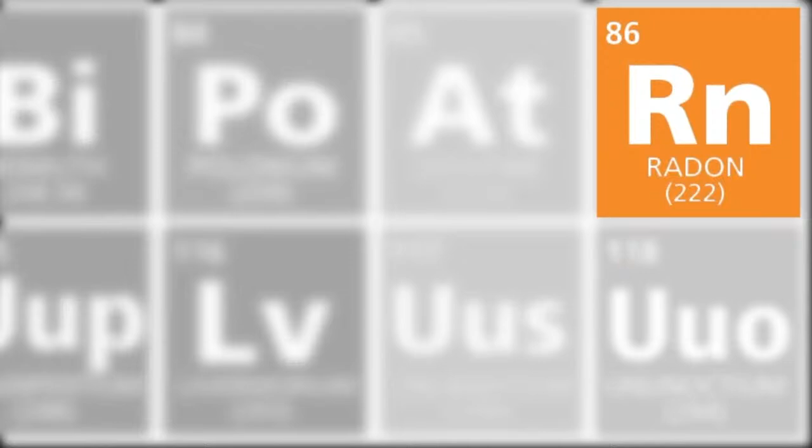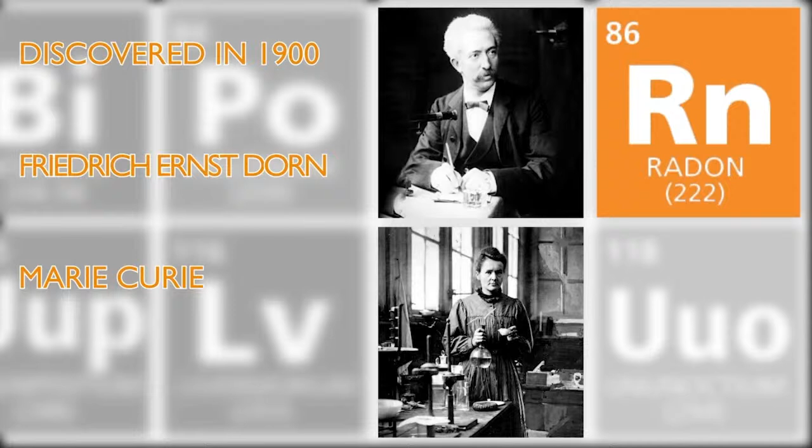Radon is a naturally occurring, colourless and odourless radioactive gas. It was discovered in 1900 by the German physicist Friedrich Ernst Dorn, who was studying the radioactive decay of radium, itself only discovered by Marie Curie 2 years earlier. This work was expanded by the Nobel Prize-winning Scottish chemist Sir William Ramsay, who identified radon as the heaviest gaseous element, 9 times heavier than air.

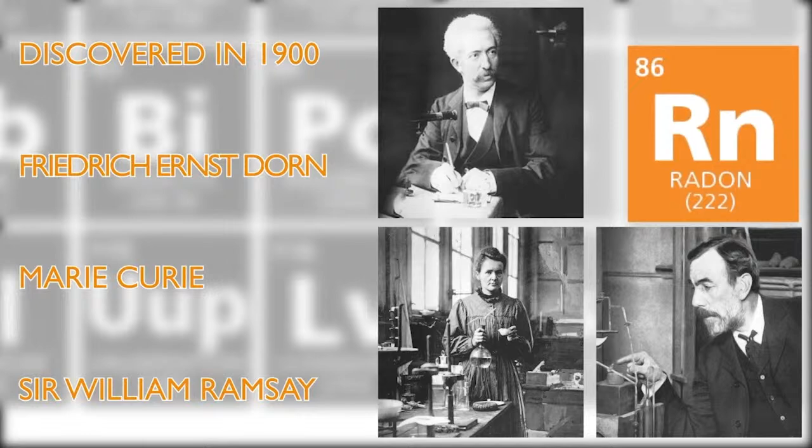In ground gas terms, most radon is produced by the radioactive decay of trace amounts of uranium found in certain types of rock and soil. And as such, the levels of gas present are determined by the underlying geology of the site, as opposed to any historical usage or pollution. This type of geology is most common in areas with granite bedrock, such as southwest England, the Peak District, northeast Scotland and Northamptonshire. Aberdeen in Scotland, being known as the Granite City, has one of the highest background radiation levels in the whole of the UK.

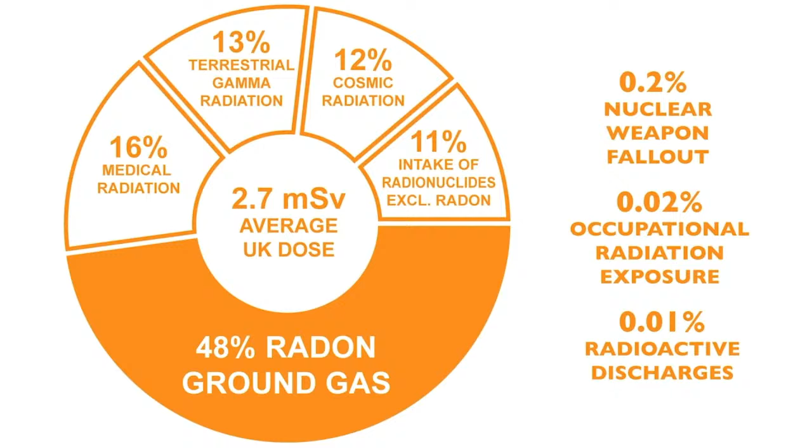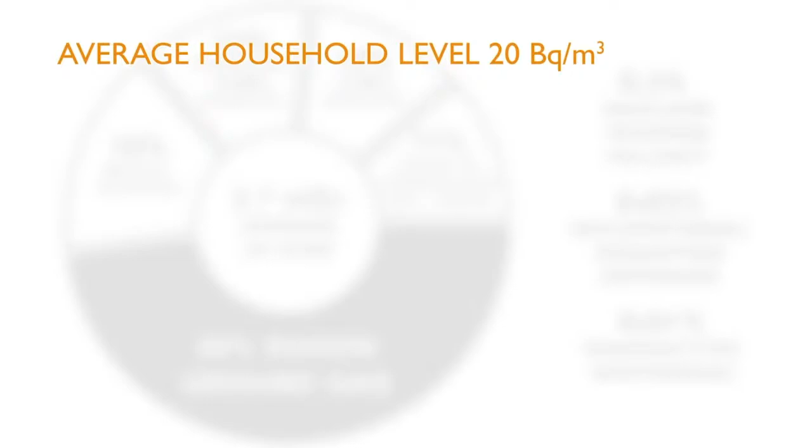Regardless of geology though, we are all exposed to a certain degree of radiation from a wide range of background sources, both natural and man-made. The radon level in an average UK home contributes around half of our typical exposure, and this level is quantified in becquerels per cubic metre. Legislation requiring action against radon in UK buildings has been in place since 1985, initially for workplaces, but has since expanded to include housing. The average household radon level is 20 becquerels per metre cubed, and even at levels up to 100 becquerels per metre cubed, individual risk remains relatively low. However, if the level goes above 200 becquerels per metre cubed, then remedial action is required.

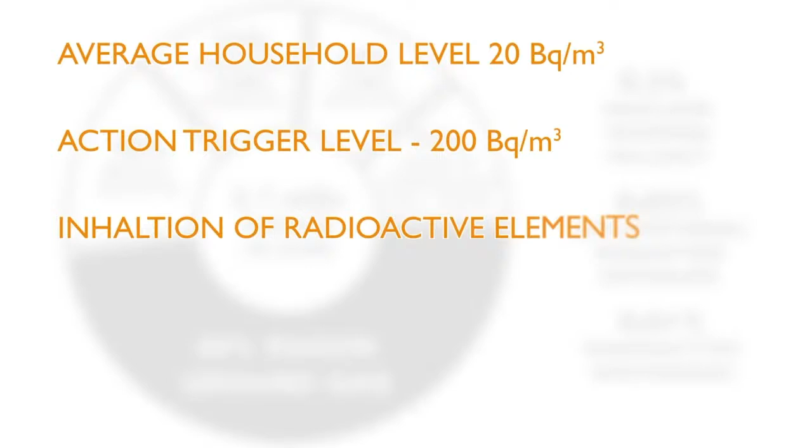Radon is harmful to humans as the radioactive elements formed by its decay can be inhaled into the lungs, where they continue to emit harmful alpha particles. These alpha particles cause localised damage to the lung tissue, leading to the development of lung cancer. The British Medical Journal estimates that around 1,100 deaths per year are directly linked to in-home radon poisoning, making radon the second largest contributor to lung cancer rates behind smoking. Some sources indicate that at least 1,200 new-built homes per year will be above the safe level of radon exposure and should have remedial action taken.

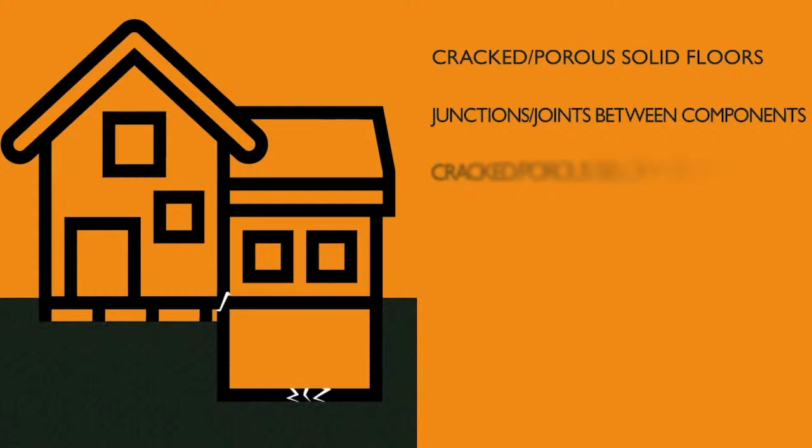This has in turn led to suggestions that building regulations may need to be updated to include more widespread radon protection. The first step to ensuring that an unsafe concentration of radon is not reached is to understand how the gas enters buildings. There are 7 main routes of ingress for radon, or for that matter, any other ground gas. Through cracked or porous solid floors, through junctions and joints between components, through cracked or porous below-ground walls such as in basements, through gaps in suspended floors, through porous walls and foundations, through gaps at surface penetrations and pipes, and through cavity walls.

Because of the geological origins of radon gas, there is generally very little scope to remove or neutralise the source of the gas, so barrier and venting solutions are most commonly employed. Limiting the extent of the ingress paths here can, however, help by reducing the long-term reliance on a barrier and providing additional protection. It's also important from an energy efficiency point of view that airflow through the heated envelope is reduced as far as possible, so minimising the overall porosity of the building fabric should always be a priority.

The principal source of radon guidance in the UK is the BRE document, Radon, Guidance on Protective Measures for New Buildings. This document is referenced in Approved Document C for England and Wales, Section 3 in Scotland, and Technical Booklet C in Northern Ireland. There is also extensive guidance available from the Public Health England's ukradon.org website. There you can find help and guidance for householders, employers, professionals, local authorities and housing associations.

The distribution of radon producing geology is illustrated in radon maps distributed by Public Health England for the UK and the Irish Environmental Protection Agency. These maps indicate the radon risks associated with a specific location. It's worth bearing in mind here that there may be issues with the available resolution of the geological data; the basic mapping will typically provide radon levels based on a 1 km by 1 km grid.

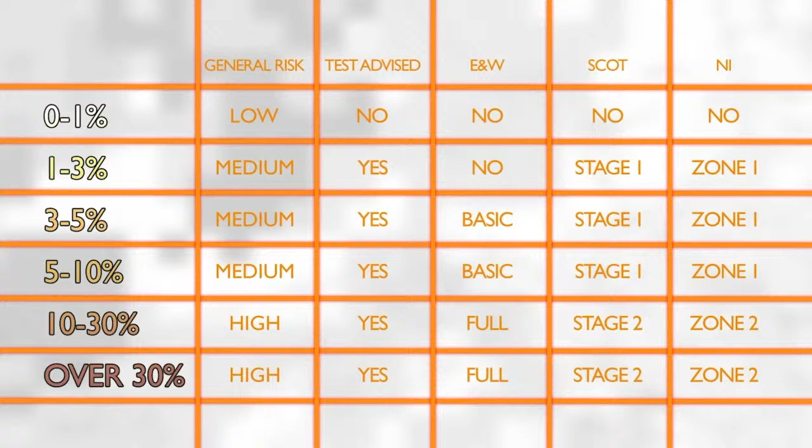On medium and high risk sites, testing and monitoring are also advised, which again is due to the highly localised nature of radon requirements, particularly in areas where different classifications meet, or sites which are on the borderline between risk categories. We'll move on to look at the various measures in detail shortly, but the most basic protection level typically comprises a radon barrier membrane within the floor or solum of the building, linked to a damp-proof course in the wall. These barrier systems should extend across the entire footprint of the building, and all overlaps and surface penetrations should be fully sealed.

Moving to full protection requires the same basic level barrier system, but supplements this with additional ventilation to increase the rate of gas exfiltration. Depending on the level of risk and the precise configuration of the subfloor and foundations, this ventilation system may be active or passive and may require the use of sumps and/or mechanical extract fans. We'll now take a look at some of the protective measures in more detail. While it's certainly true that there are fewer variables to consider with radon protection than with some other types of ground gas or site contamination, it's still important to ensure the system is well designed and fit for purpose.

Ensuring a barrier membrane system works effectively requires the material used to be suitably robust and the system to be well installed. Like other ground gas protection measures, the system is only as good as its installation, and if joints are not properly sealed or the membrane is punctured, then adequate performance cannot be guaranteed. A properly designed and fitted barrier will, however, also function as a damp-proofing membrane. The BBA requires radon barrier membranes to be at least 0.4 mm or 400 microns thick.

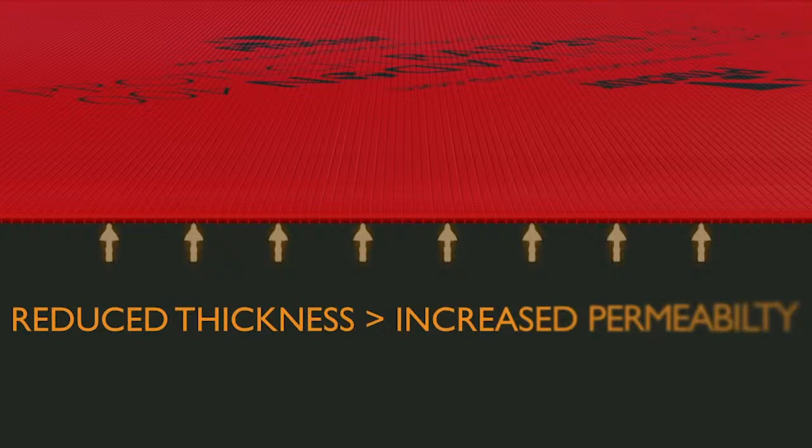It's important to remember though that membranes, if stretched, will become thinner, so ensuring the material has good tensile strength and elongation characteristics will make sure that the membrane retains its properties. When installed under a slab, for example, concrete poured on top can exert forces on the material, causing it to stretch and become thinner, creating a zone where the permeation of gas becomes more likely, even if the membrane is still intact and unbroken. Reinforced membranes made from virgin material typically have the best mechanical strength properties, thickness for thickness. While a thicker membrane can certainly work adequately, the additional weight and thickness can make detailing and handling more difficult.

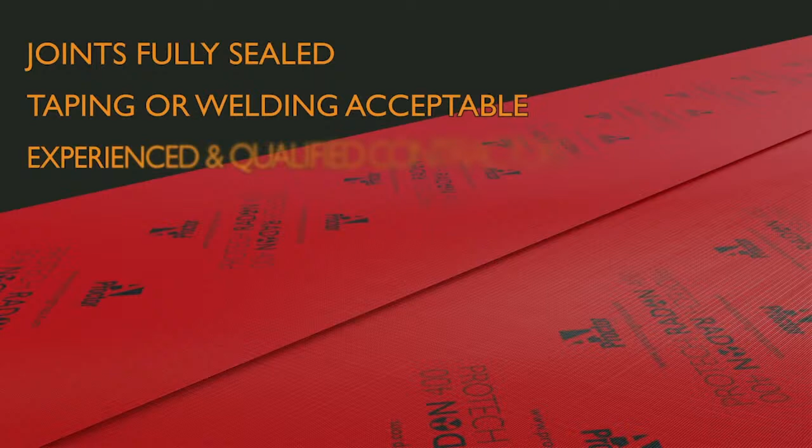Joints in the membrane can either be taped or welded. However, in either case, appointing experienced and suitably qualified contractors is recommended. This ensures a good result is achieved first time without requiring remedial actions to fix any issues arising from poor workmanship. However the membrane is installed, it should be thoroughly inspected prior to covering, as fixing any issues after the membrane is covered is often effectively impossible.

This inspection should look for any continuity issues such as unsealed joints, punctures, or areas where the membrane is not adequately supported, for example at boundaries where voids may cause excess elongation. Seals at all surface penetrations should also be inspected, as these details can be problematic on site, particularly if pipes are located near foundations or if installation took place under less than optimal weather conditions.

Finally, although it may seem obvious, it's also important that the protective membrane and any associated accessories, such as DPCs, extend across the entire footprint of the building. This means from external to external, closing off any potential gas ingress points. This includes closing off any cavity walls with a suitably sealed and gas-resistant DPC material.

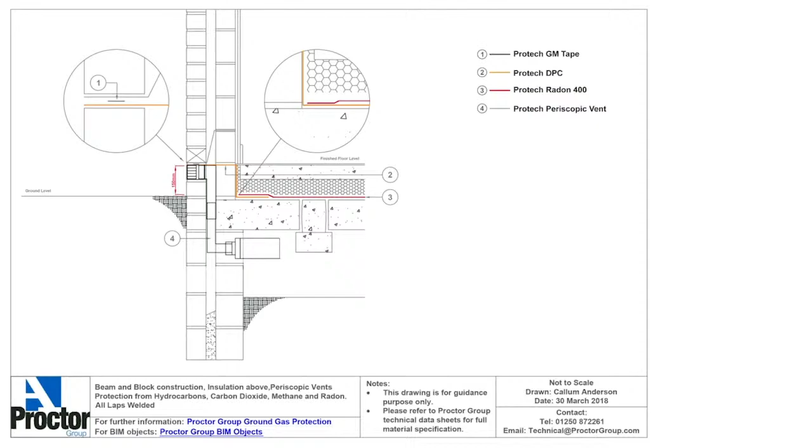Where it's necessary to move beyond a basic level of protection, ventilation should be introduced below the barrier membrane. This example shows a typical beam and block floor construction with a subfloor void. The gas-resistant membrane is placed over the beam and block subfloor and then screeded over. There are a number of systems and solutions for introducing ventilation to this subfloor area, such as ground-level vent boxes, periscopic vents through external walls, and simple air bricks.

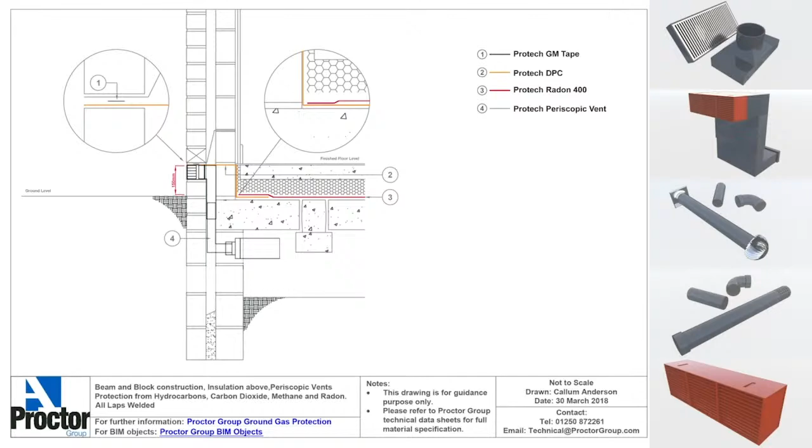Exactly which of these solutions is most appropriate depends on the specific building envelope and relative locations of ground and finished floor levels. Provided the vent openings have sufficient open area to deliver the airflow required, they will also do a similar job. Where to position these openings to effectively negate gas buildup depends to a certain extent on the layout of the foundations and any supporting structure. While the best course of action is to discuss the size and location of vent openings with a specialist, there are some simple rules we can apply as initial guidance.

Based on NHBC guidelines, vent openings should typically be placed at maximum of 2 metre centres along external walls and not more than 450 mm from corners. The relationship between voids separated by ground beams should also be considered.

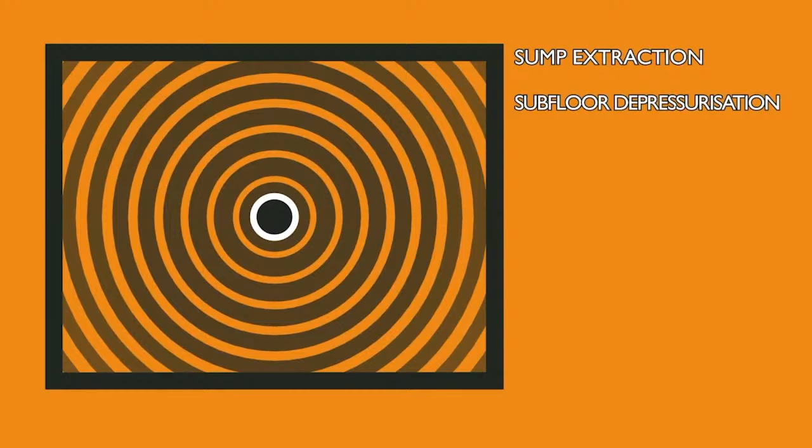In ground-bearing slab applications where full radon protection is required, it's necessary to provide radon sumps to facilitate subfloor depressurization. The sumps and pipework are installed under the slab, with gas collected by the sump and ducted to an extract point above ground. This enables a subfloor depressurization system to be installed with relative ease at a later date, should it be deemed necessary post-completion.

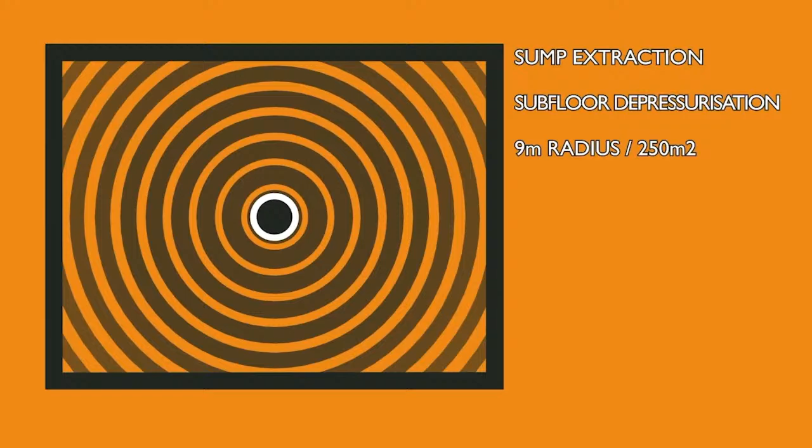In a typical house, a single central sump is normally sufficient and will provide extraction over a radius of 9 metres from the sump, around 250 square metres. If the soil is particularly permeable, this may increase to a 15-metre radius, but this would require project-specific assessment. If the area under the slab is subdivided, for example with foundation beam or other compartmentalisation, a separate sump may be required for each compartment depending on soil conditions.

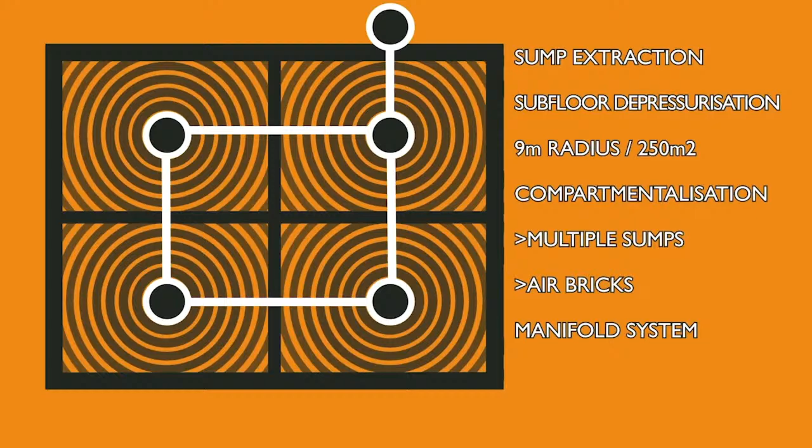At the minimum, pipes or air bricks in the subdivisions should be provided to ensure the sumps can provide adequate extraction. If multiple sumps are used, they can be connected with a manifold system and ducted to a single extraction system. This extraction system creates the depressurization that removes the gas. Most commonly, this is a powered or active system, where an electric fan is used to drive the extraction. While it's possible to use a passive system without a fan, active systems are more common.

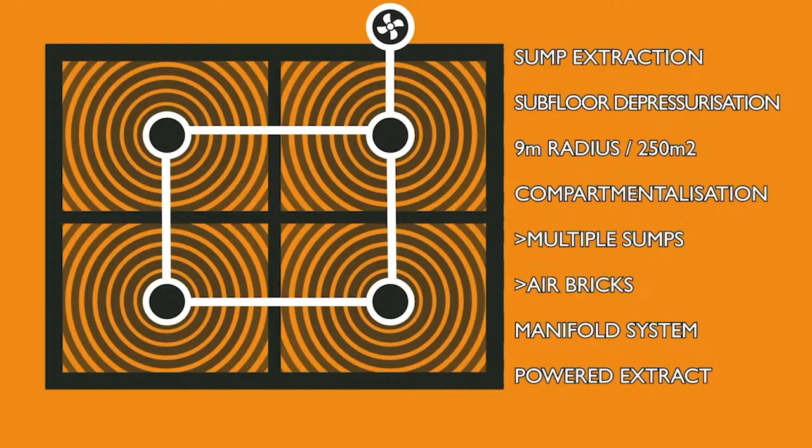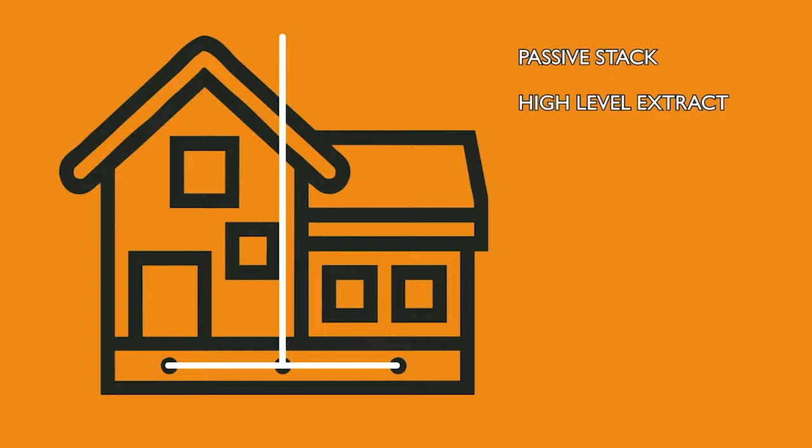This is because the depressurization aspect of the ventilation system is generally only used if post-completion monitoring shows that it is required. If this is the case, a fan can easily be attached to the built-in pipework to provide this. Passive systems typically require more forethought and complex pipework taken through the building to high-level extract points to create a passive stack effect. In either case, however, it must be ensured that gas is extracted to a safe location away from opening windows and ventilation system intakes, with all pipe joints solvent welded rather than push-fitted.

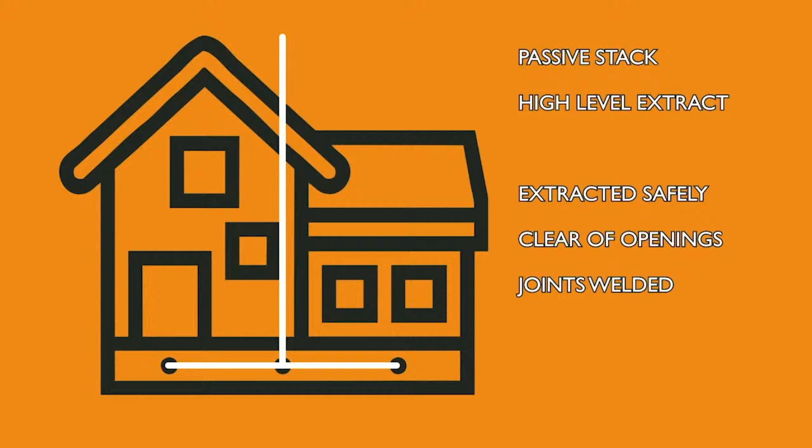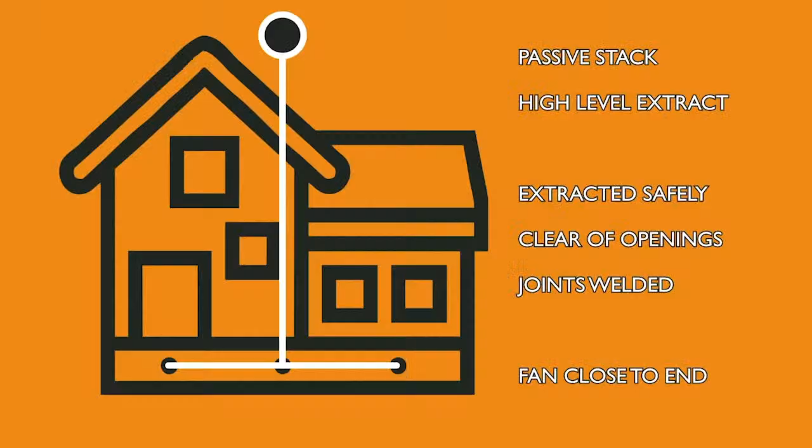If a powered fan is to be used, it should be located as close to the end of pipe run as possible to ensure the pipework is kept under suction, in order to prevent any gas leakage in an unintended area. This is particularly important if pipework is to be run through the living spaces in a dwelling. Whatever the construction, if ventilation is required, it's important to ensure it's done right, as systems which are ineffective can lead to high gas readings and complex remediation. Conversely, an over-engineered system can increase timescales and costs with no particular benefit.

At the A. Proctor Group, our experienced technical support team can assist in the specification of these systems, reviewing drawings and site investigations to ensure a suitable solution is specified and optimised to fit the individual project circumstances.

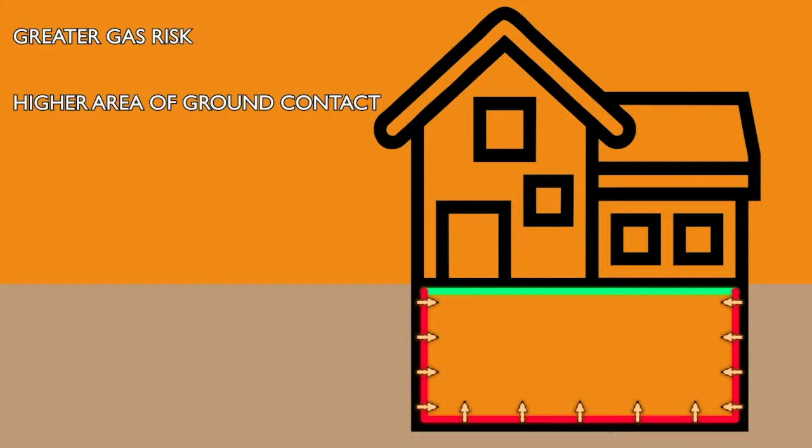As well as the above-ground living space, it's important that any basements or occupied underground spaces are protected, particularly as these are at greater risk as gas can permeate not only through the floor but also through the retaining walls. For a typical domestic house, this means the areas in contact with the ground could be several times higher than for a similar house without a basement. This risk is further compounded by the lack of natural ventilation available in spaces below ground level.

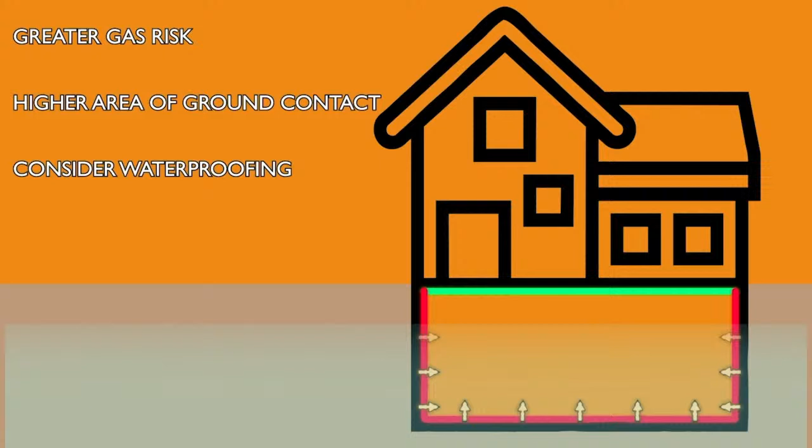Alongside this, it's also important to consider waterproofing when creating a new basement or converting an existing cellar. Guidance and recommendations relating to basement waterproofing are given in BS 8102:2009, which also advises on the importance of considering radon mitigation when designing basements. In these situations, it's usually best to appoint a specialist to design and install the combined system, as radon and waterproofing requirements can sometimes conflict.

If it's necessary to conduct monitoring of radon levels in a home, this is typically done by using detectors supplied by Public Health England. These detectors are placed in the home for at least a 3-month period to assess the level of radon exposure for the occupants. PHE typically recommend a year of monitoring for new homes in radon-affected areas, and this data can then be used to determine if active measures such as fans are required or if the basic level of protection is sufficient. This is not typically required for extensions. However, if substantial structural work is undertaken or the dwelling is in a particularly at-risk area, it is worthwhile considering.

To conduct the testing, PHE-supplied radon monitoring devices are placed in representative areas of the occupied spaces and then returned to PHE for assessment at the end of the testing period. Generally, the detectors are placed in areas like TV stands or bedside tables to give an accurate impression of occupant exposure. They should not be placed in areas which are close to ventilation or windows, or in places away from the main inhabited zones in the dwelling, for example on top of a high wardrobe or on the floor.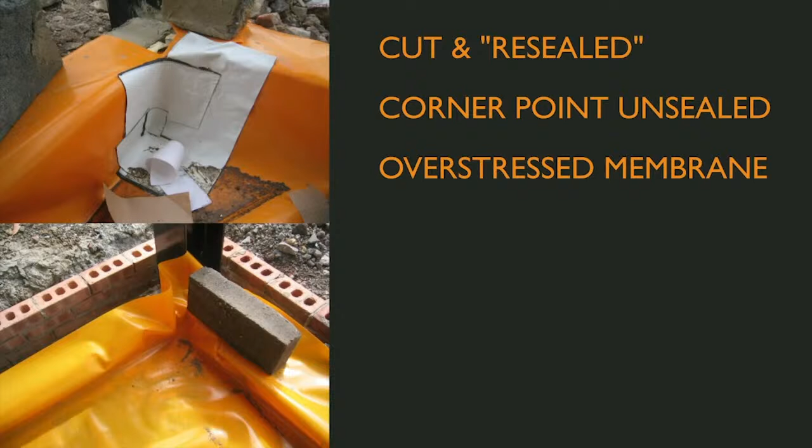We'll now move on to take a look at some common installation situations and the difficulties that can arise with each. We've discussed this before in our webinar on brownfield sites, but installation quality is a critical part of ground gas protection, so it's worth repeating here. We'll begin with corner details, which are probably the most common detail present on every site. This corner has been cut and resealed using flashing, but it has been left unsealed at the corner. The membrane has also not been pushed into place properly, so any subsequent concrete or screed pours will overstress the membrane. This may lead to tearing and subsequent gas ingress.

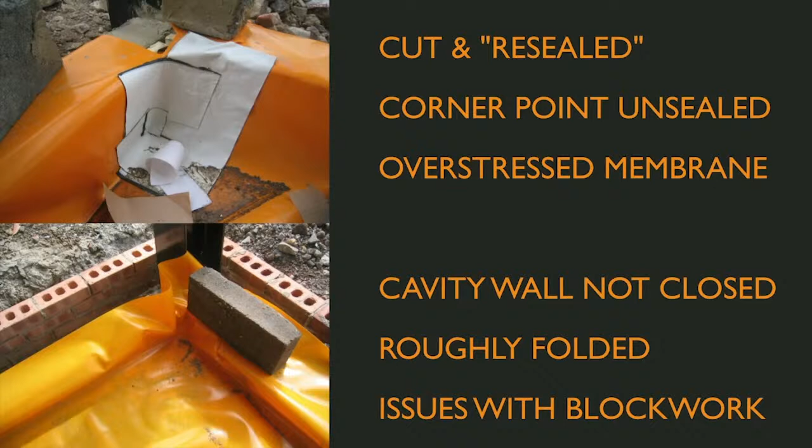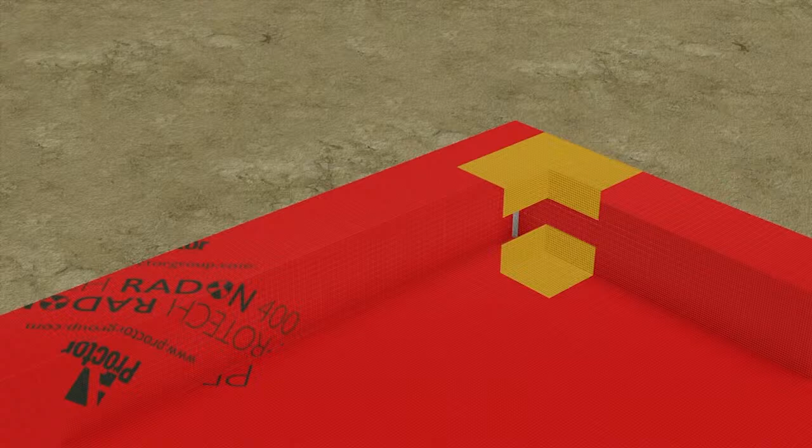In this case, the membrane has not been extended to close the cavity wall, leaving an open pathway for the gas. The membrane is also roughly folded into place, which may cause problems when it comes to installing further courses of brick and blockwork. The most reliable and time-efficient method of getting a good corner join is to use a preformed corner unit. In most cases, however, these corners will need to be adapted to fit precisely into place. The important part of the corner, the integrity of the actual corner point itself, can be maintained by carefully cutting the corner unit across the middle and sealing both the top and bottom sections into place as shown here. This ensures the corner area remains fully gas tight.

Another detail found everywhere is the simple membrane joint. Apparently simple enough, joints between adjacent runs of membrane commonly cause problems. The most obvious problem is the missing sections of sealing tape, creating a path for gas to bypass the barrier, but tape joints can cause other problems.

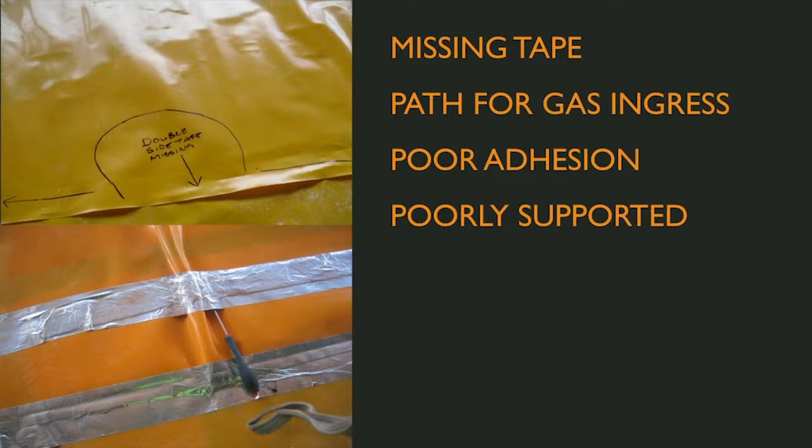Here we can see where the tape run has not adhered to the membrane, where the membrane is not sitting flat on the substrate. The most effective method, and that used by the majority of NVQ2 qualified installers, is to weld membrane joints. This not only saves on the cost of tape, but it is far more tolerant of weather and site conditions, as tape adhesion is not an issue.

Successful tape jointing requires a clean and dry membrane surface to joint, and temperatures within the tape's operating range, typically 5 to 30 degrees. Assuming these conditions are met, the optimal procedure for a successful tape joint is shown here. By moving the butyl tape joints to the edge of the lap, it becomes far easier to ensure the joint has been done correctly. This positioning of the tape also ensures any concrete screed poured on top of the membrane cannot enter the joint and put additional pressure on the integrity of that joint.

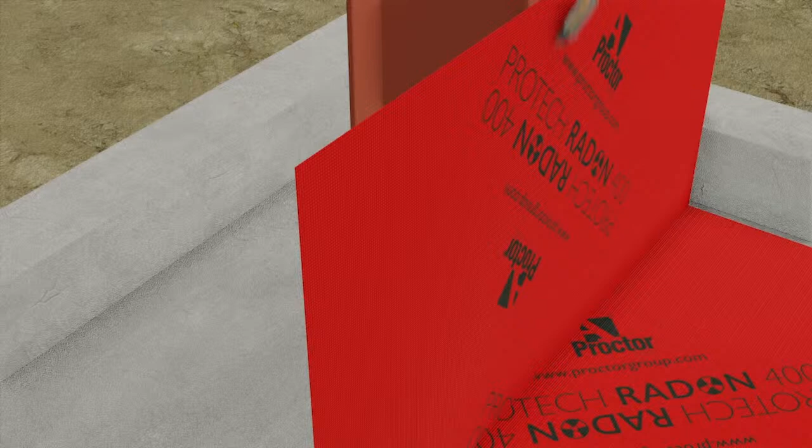Detailing around stanchions is a little more difficult, but does not pose too many problems if the method here is used. The most important thing to note here is that the flashing tape used is of good quality and matched to the membrane utilised. As manufacturers, we recommend and supply tapes that we know work well with our membrane systems, and this advice should be followed. The flashing tape should be rolled into place without leaving gaps underneath.

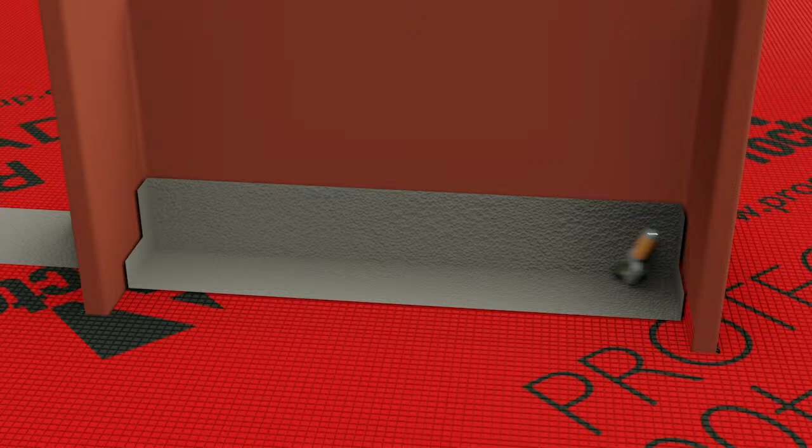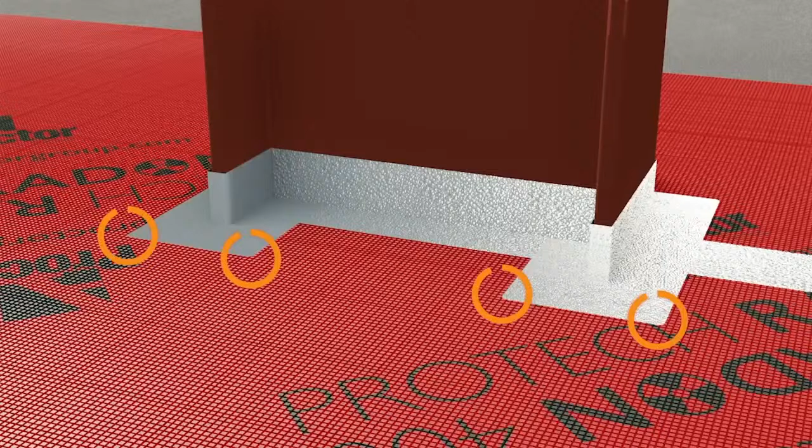Flashing tapes are usually less resistant to elongation than membranes, so it's important these areas are fully adhered to a properly supported substrate to limit the potential movement. The rounded corners shown here are also important, as these are less likely to lift than a sharp corner and put much less stress on the membrane and tape interface.

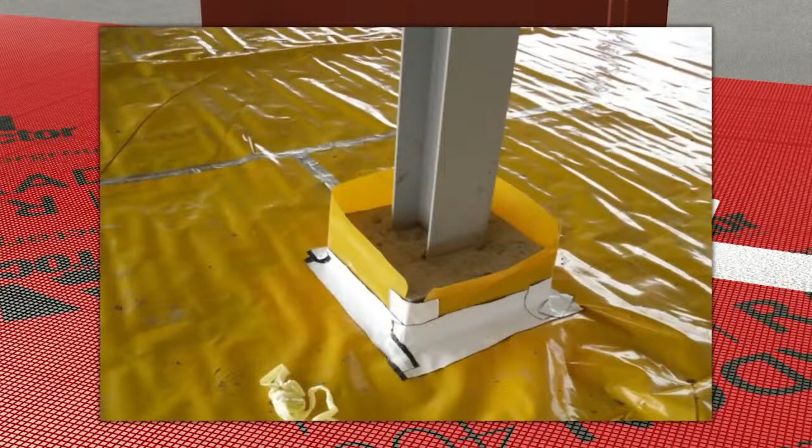Although it may seem obvious, it's also important to ensure the gas-tight layer is continuous. If, as shown here, the stanchion is in the centre of a concrete column or pile cap, the entire area must be sealed. Pipe penetrations are another area it's important to get right, as they are a common feature on many sites. These images shown are of the more common problems that can occur.

In the first case, the supplied top hats did not fit properly, so the installers have got a little creative. Whilst it's possible that this detail may work to provide a gas-tight seal, it is by no means a given and would be almost impossible to verify. In the second, the smaller pipe appears to have been relatively well sealed, but the larger is not sealed at all and corresponds to a lap in the membrane, creating additional complications. The close proximity of the pipes to each other also makes detailing and sealing using proprietary top hats difficult.

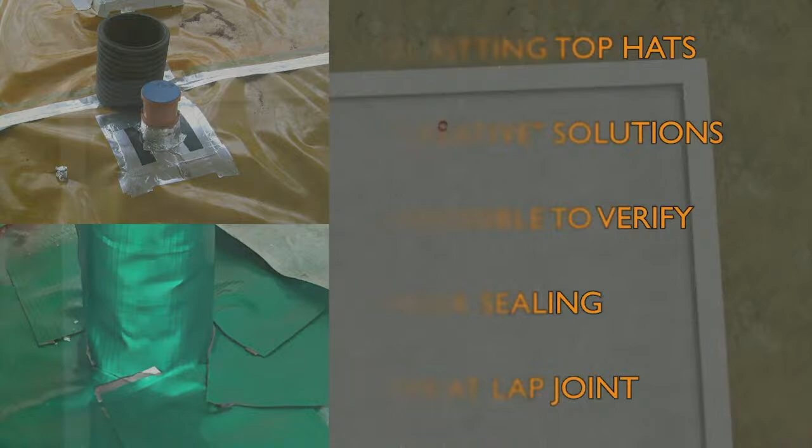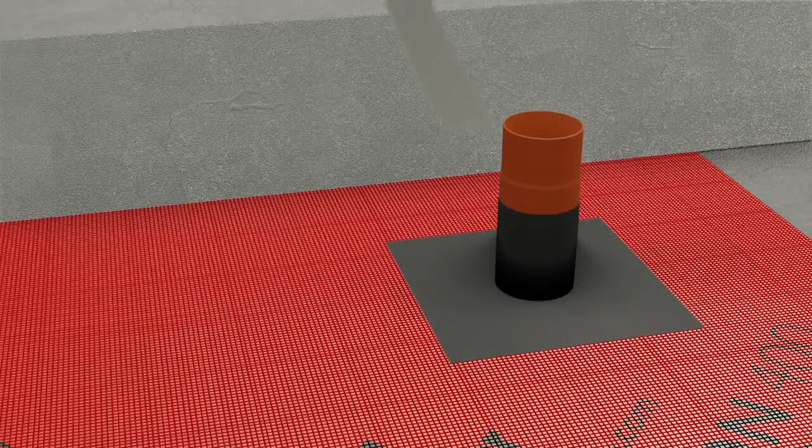Here we can see the correct procedure to provide a gas-tight seal to a pipe penetration. As with columns, this is not particularly difficult to achieve. Again, as with stanchions, ensuring the membrane is cut as little as possible and the top hat is smoothly seated onto the membrane is critical. The flashing tape should be firmly adhered in place and properly supported.

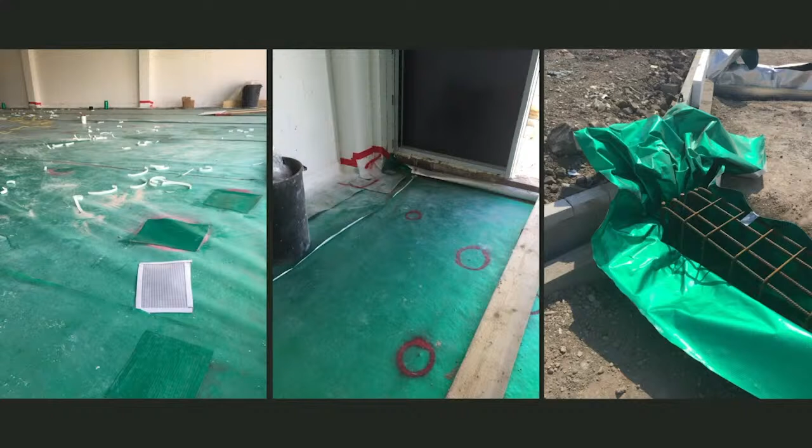The general conditions around a site are often as important as specific details when it comes to validation of membrane installations. In these images, you can see that patches have been applied to the membrane haphazardly and messily. The marker spray is still visible around patches, indicating that the applied patches are too small to give the required overlap.

In this case, we can see the structural reinforcing bars laid directly onto the membrane with no protection fleece or board used. This protection is not only important to prevent direct puncturing of the membrane, but also to prevent damage from cutting using saws and grinders. These processes produce large amounts of sparks, which, if they contact the membrane, can melt holes and cause significant damage. So, whilst a small increase in cost per square metre to specify a fleece or protection board may seem unnecessary, the effect it can have in reducing remediation costs and delays is more than worth it in most cases.

As with all ground gas protection systems, the critical aspect of designing out radon problems is making sure the requirements are fully understood, and any implications are factored into every stage of the project, from design to construction, and finally to ensure monitoring if needed. A really important part of this is working with experienced project partners who are familiar with these problems and have a good understanding of how to solve them.

With that in mind, we'll now move on to the Q&A session.